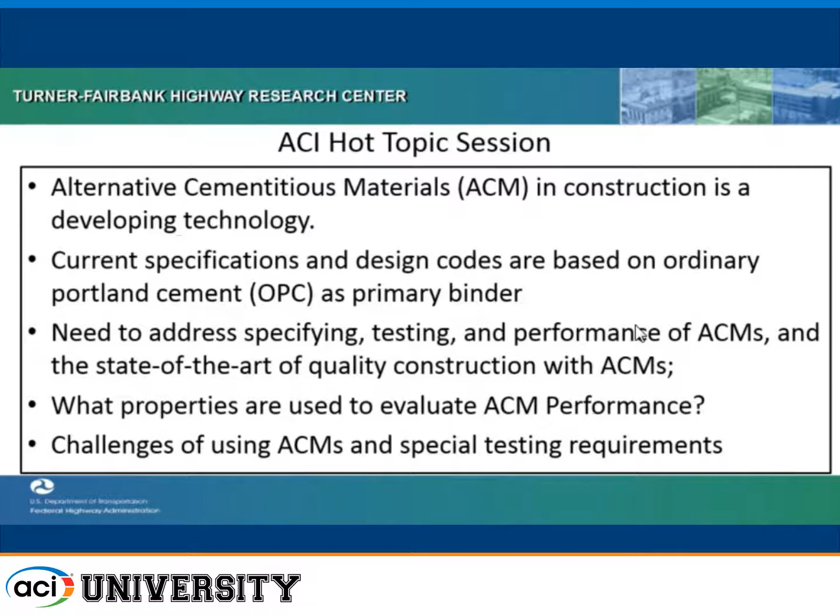What properties are used to evaluate ACM performance? Well, there's already been some discussion of that. I think we're going to have to adapt our test methods to look more toward performance rather than prescription, and we're going to have to develop special testing requirements for these materials.

The objectives, key factors are sustainability in transportation. This is certainly a topic that's being discussed quite a bit - not only the sustainability of constructing the pavements and structures, but also operating them, and how long they're going to last. Do they affect other sustainability functions within society as well? Carbon dioxide footprint is very important, along with long-term durability in all types of weather and climate that we see in the highway system.

Performance specifications and test methods need to be adapted for both cement and concrete. For the range of new cements, we need quality assurance tests for the cement itself. A state DOT is not going to just assume that the powder they're getting in the bin at the concrete plant is going to meet the criteria of building a quality structure. They're going to need some sort of target chemistry, fineness, and properties that they can check ahead of time to make sure they're getting the material they contracted to receive.

Concrete made with ACMs needs to meet both material and structural properties. We want them to be durable, but they also need to be predictable in terms of their structural performance, their volume stability, as well as their stress-strain and fatigue capabilities.

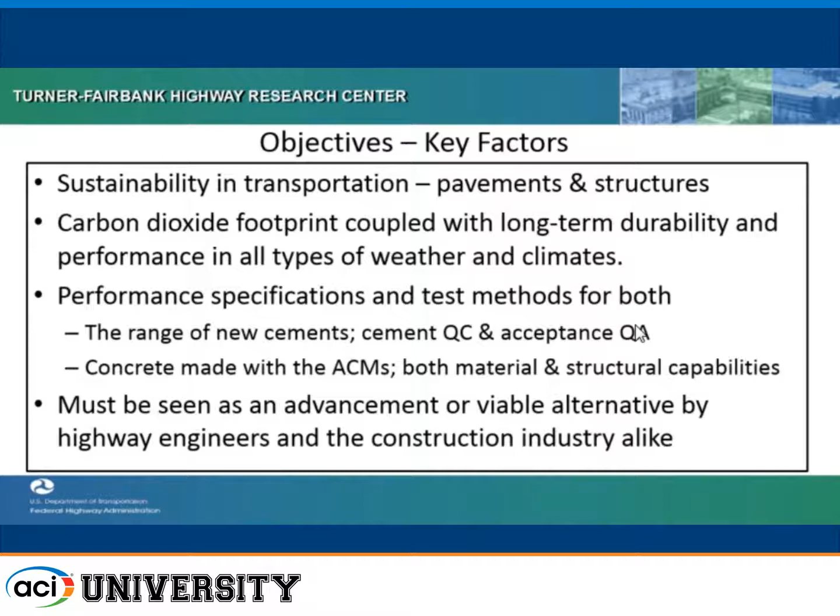Do we modify the tests and specifications, or is a whole new paradigm needed in qualifying these materials? How do we verify that we're building with quality? Many questions will be asked, such as compatibility with ordinary Portland cement - in many cases we may be using this in contact with ordinary Portland cement, and how is it going to perform? Are there constraints on what aggregates we can use, on how they are cast, the setting properties, as well as volume change and cracking tendencies?

Structural and corrosion properties with reinforcement are also very important, as has been addressed already.

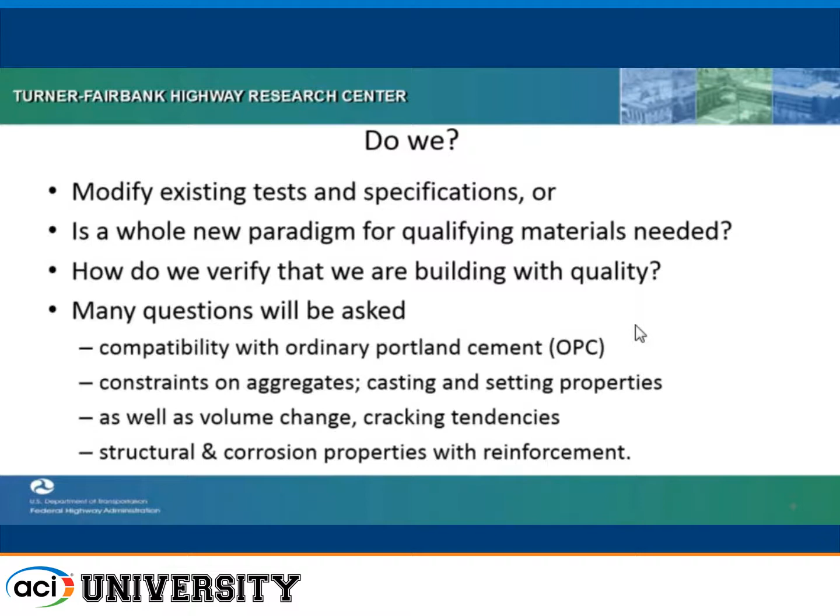Just a little background: Federal Highway has an exploratory advanced research program, and the project that Kim is working on is one of those projects - the project with Georgia Tech. We also have a project with UCLA and NIST on SCMs and ACMs, and a project nearing completion with Princeton and NIST on ordinary Portland cement hydration and nanochemistry, and how this can be applied to models of hydration. If that's successful, maybe we can move ahead and model some of the ACMs in like manner.

We recently had a workshop on ACMs and alkali silica reaction at Turner Fairbank Highway Research Center, and we think that was very successful - a lot of good conversation back and forth. As a federal laboratory, we also have the capability of doing cooperative agreements called CRADAs, where we can actually work with an industrial developer and see how the technology fits in with the highway industry.

We have two cooperative agreements that we work with, Ceratech in one case and Solidia in another. We weren't trying to develop the particular product, we were just trying to see how it fits in with the highway industry. Is it something we should consider?

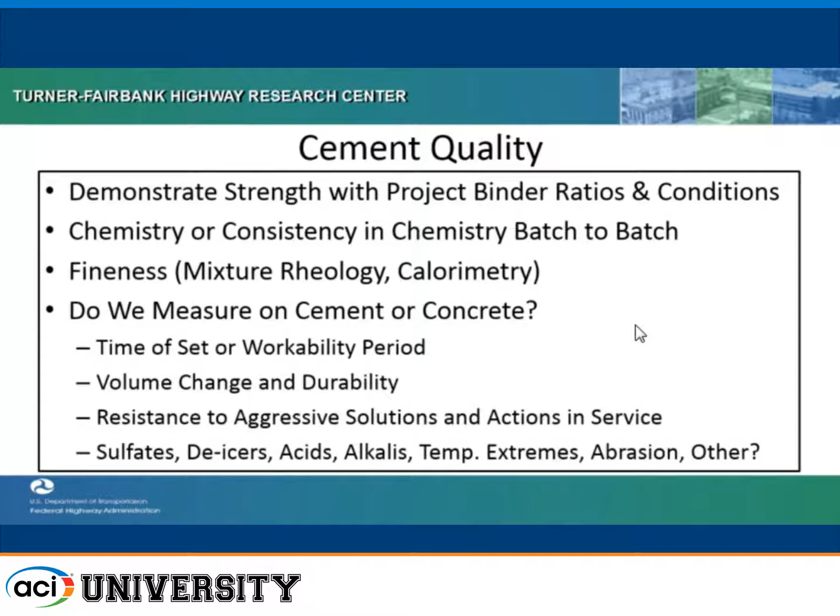Things like sulfates, de-icers, very important. Are they going to hold up over time in the presence of all the various chemicals we're using for de-icing of highways and bridges? Things like acids and alkalis and temperature extremes and abrasion, of course. Some states are still using studded tires, and if we don't have the abrasion resistance, that's a potential problem. Maybe some of these will be better at resisting studded tire wear.

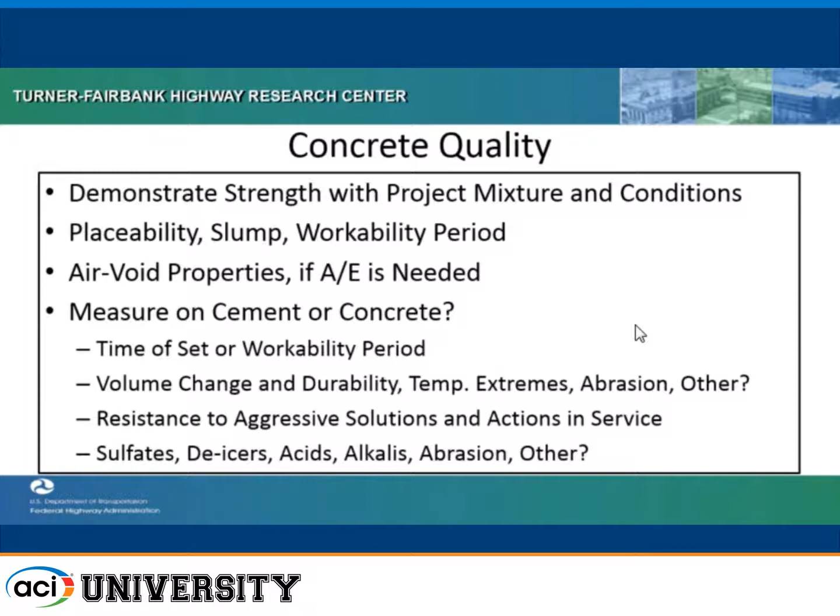On the concrete quality, we need to demonstrate for the particular project with a mixture that's going to be used, that you're going to get strength. Can you pump this material and place it if necessary? Air void properties - so far, most of what we're looking at, we're using air entrainment. Now, there may be some alternative cements that will have sufficient durability without needing air entrainment. That would need to be a factor to be considered.

This slide just reviews the current situation where most concrete infrastructure in the U.S. and Canada probably is ordinary Portland cement, but we are using quite a bit of the various different supplementary cementitious materials - quite a bit of Class C and Class F fly ash. Many agencies are going to higher amounts of fly ash. We're also discovering that the fly ash supply is changing. What fly ashes were available in some cases are not available anymore, and you may have to go somewhere else to get them. So to some extent, agencies are switching around to different materials that they're using, and this is somewhat of a challenge.

Slag cement is being used quite a bit, silica fume to some extent. There's more and more interest in natural pozzolans, particularly as fly ash may not be available in certain areas, then natural pozzolan may be a substitute for the fly ash, particularly in alkali silica reaction mitigation. Some state agencies are routinely using ternary blends as well.

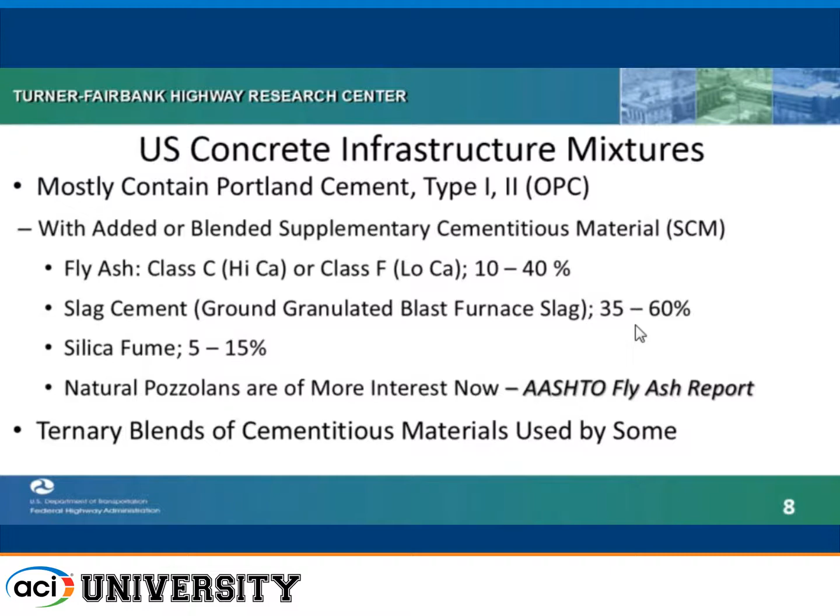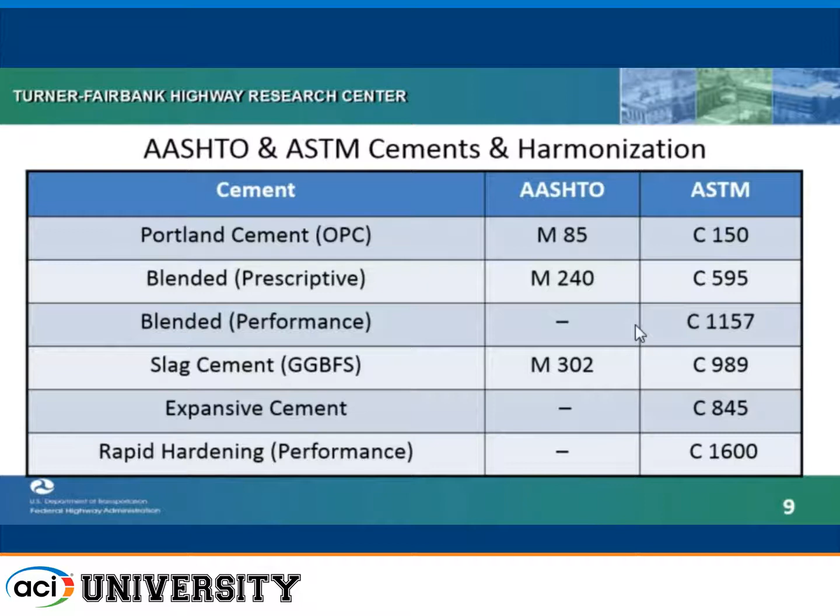This just kind of reviews the different cement specifications. To a large extent, for the typical cements that we're used to using, AASHTO and ASTM have harmonized so they're pretty much the same specification. But ASTM does have the performance blended cement, the C1157, the expansive cement specification, and the rapid hardening performance specification. Those might be used for some of these alternative cementitious materials since they're based mainly on performance criteria.

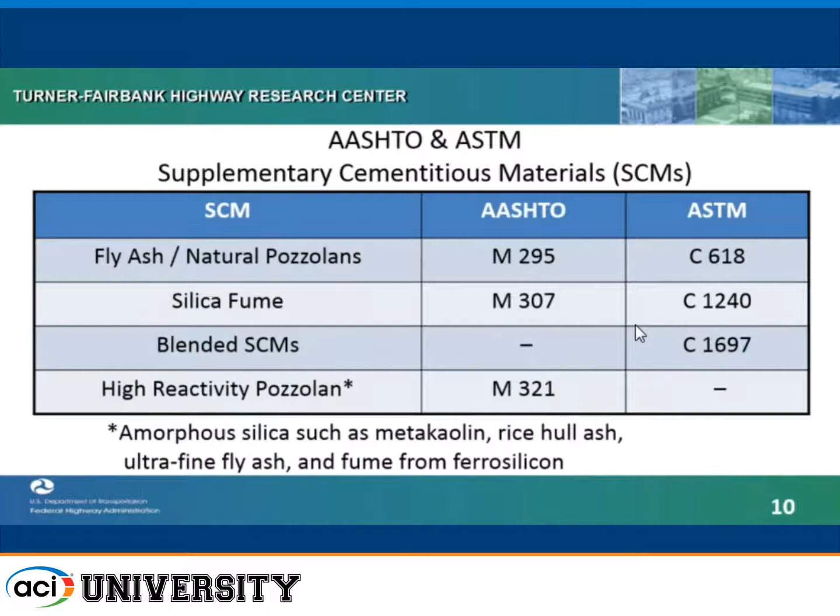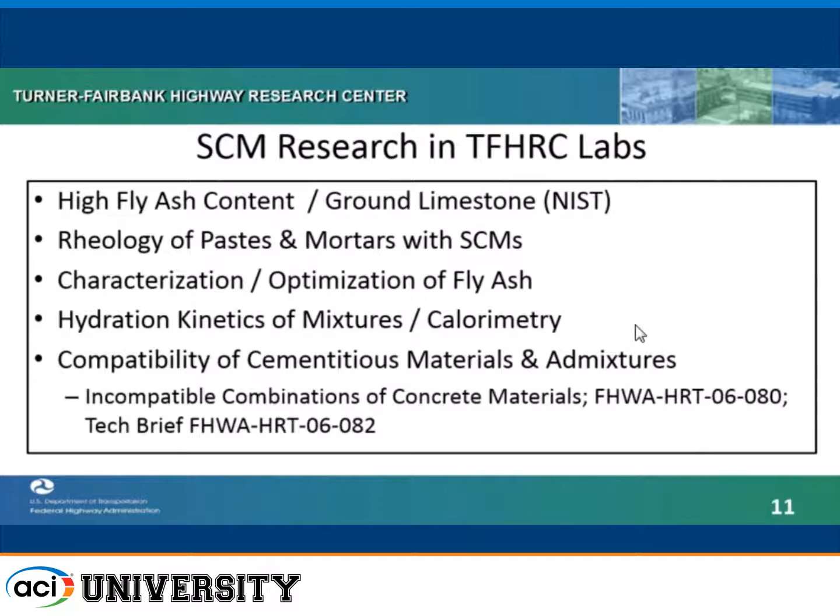These are the specifications for supplementary cementitious materials, which, as was discussed, we're trying to use more and more of these materials. In terms of the research we're doing at the Turner Fairbank Highway Research Center, we're taking a look at higher fly ash content. We're working with NIST on using more ground limestone with Portland cement. We're looking at rheology of pastes and mortars with these different materials, characterizing and optimizing fly ash. We have the capability of looking at the calorimetry and the kinetics. And there's some previous work done by Peter Taylor on the compatibility of cementitious materials with admixtures, which addresses various tests that might be used to look at particular cements with particular admixtures.

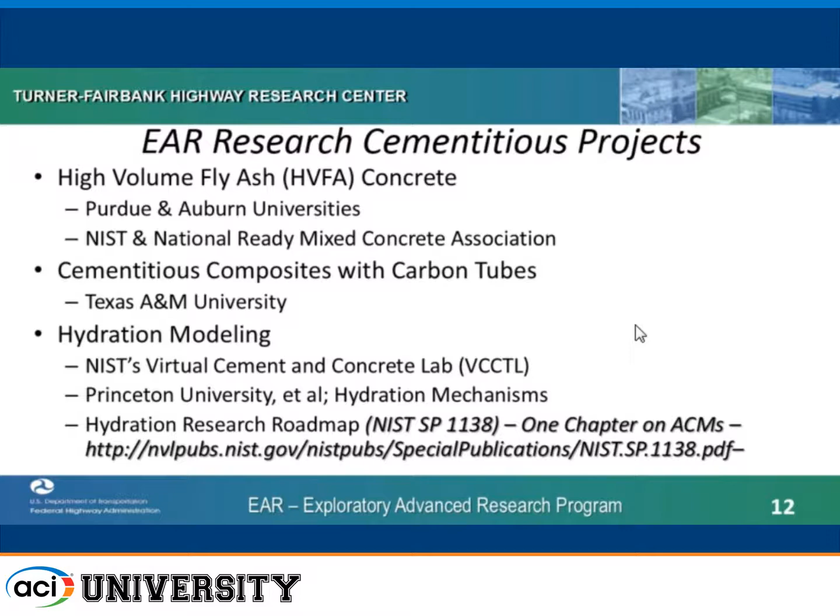With respect to our exploratory advanced research program, the high volume fly ash studies were done with Purdue and Auburn universities. Also NIST and NRMCA were involved. We did some work with cementitious composites with carbon tubes with Texas A&M, hydration modeling with NIST and Princeton, and also Federal Highway helped support the Hydration Research Roadmap, which is a NIST publication, and there is one chapter in that publication on alternative cements.

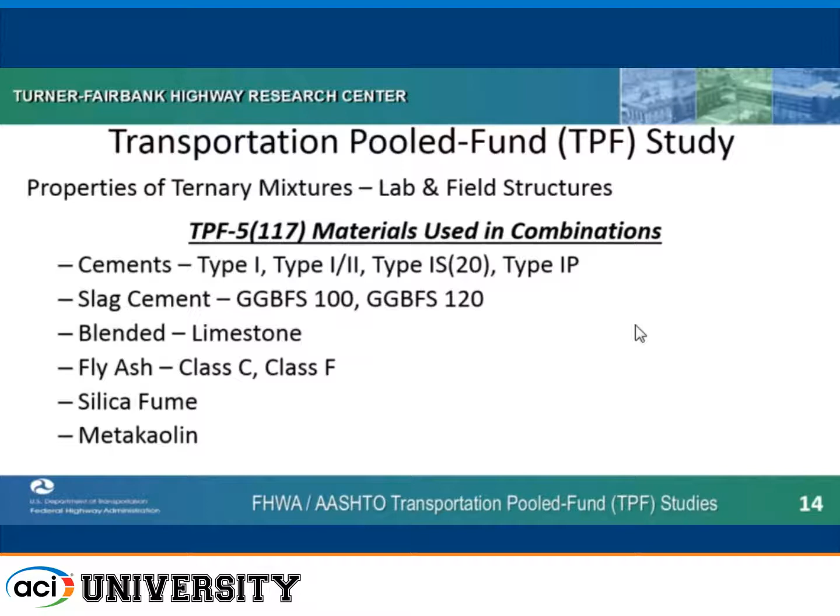With respect to alternative cementitious materials, we do have a federal agency steering committee which has occasionally met. There are other agencies interested in these materials, particularly the Corps of Engineers, NIST, and the Department of Energy for some of the nuclear research as well.

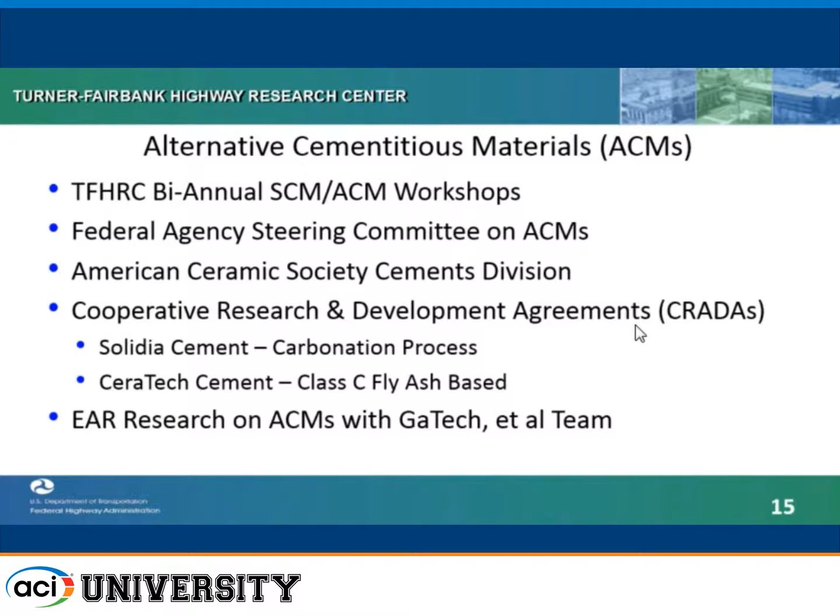As I mentioned, we do have these cooperative research and development agreements. With respect to those CRADAs, the conditions are that we, as the government, are not directly endorsing or promoting these particular materials, but we're working with the developers of the technology to see if they would fit into the type of materials engineering that we use in the highway industry. I'm not going to get into any detail on exactly what the technologies are.

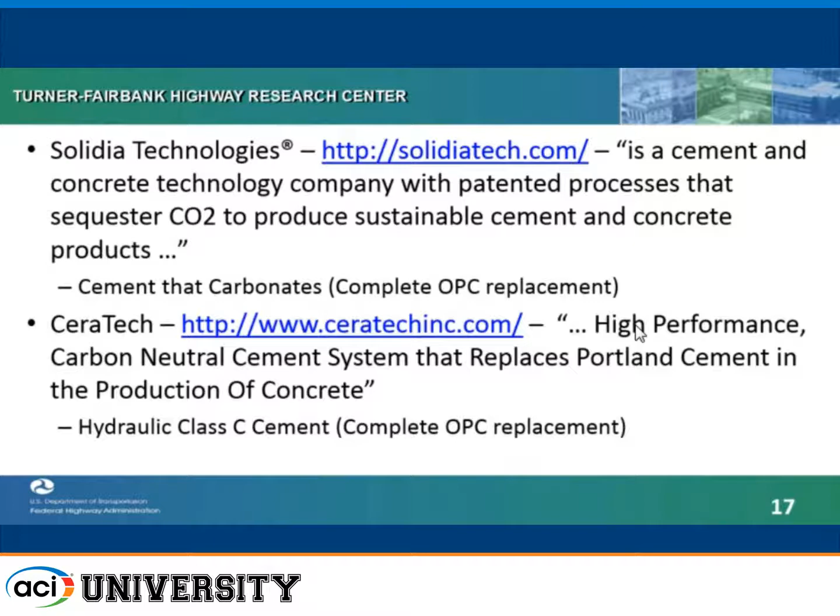Both Solidia and Ceratech have white papers on their websites that describe the technology. Solidia is basically a cement that carbonates rather than hydrates, and Ceratech is a system where you have a hydraulic Class C fly ash where the hydration of that material is controlled, and you get properties similar to Portland cement concrete.

With Solidia, we recently completed some freezing and thawing tests, again with our 3/4 inch maximum size aggregate air-entrained concrete. I think that was 540 cycles of freezing and thawing, and in general the material's holding up very well. We're getting a little bit of scaling, which is not a surprise.

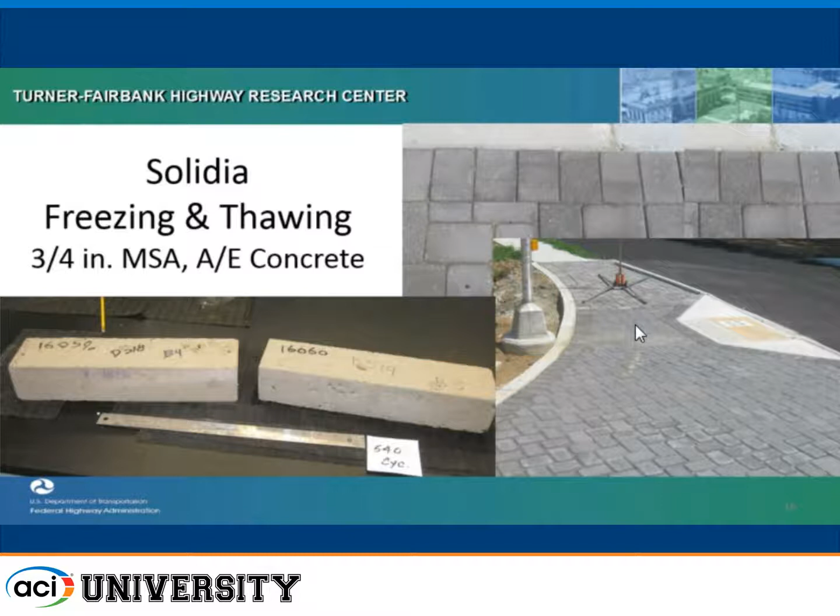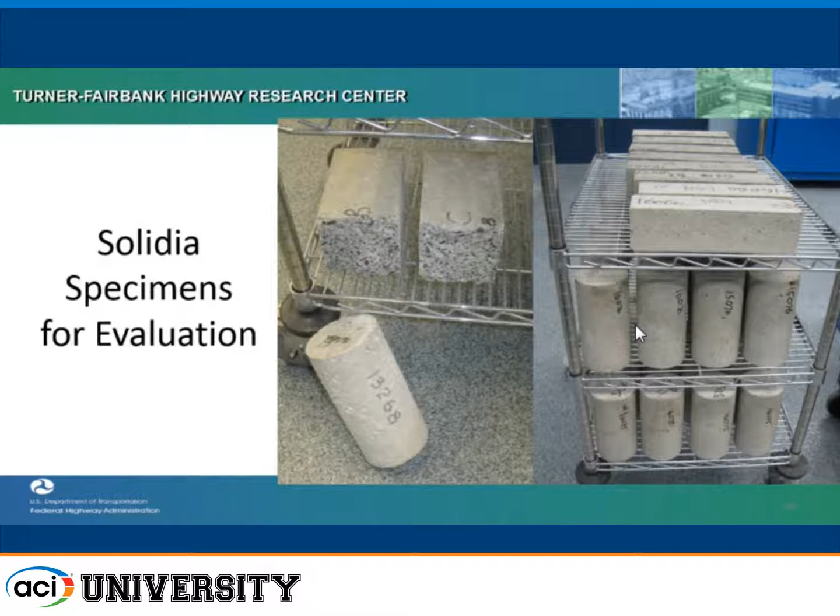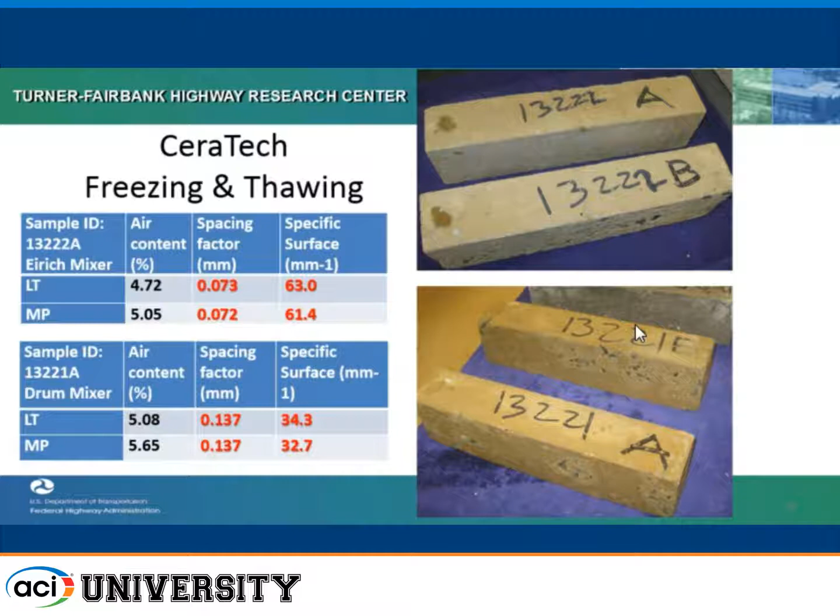With Ceratech, we've done freezing and thawing work with it. We actually mixed two batches in two different mixers, basically the same material—one in a high-energy vertical shaft mixer, and the other in an ordinary drum mixer. The freezing and thawing durability results are pretty good on both, with a little bit of scaling again. But it's interesting to note that the spacing factor with the high-energy mixer is about half that of the drum mixer, so we were making smaller air bubbles with that high-energy mixer.

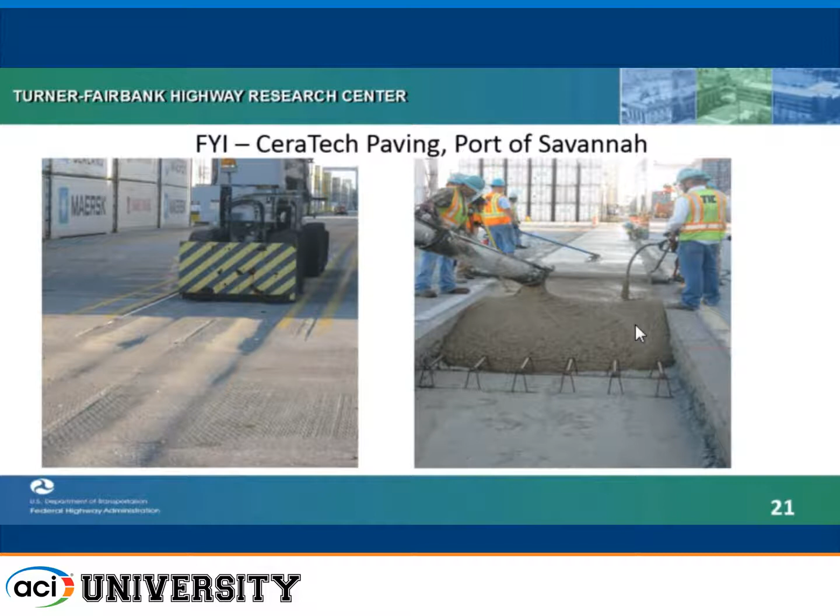With Ceratech, it has been used in various industrial and transportation applications. This is an example from the Port of Savannah. I went down and observed a project where they were doing paving, replacing the rutted asphalt pavement for the heavy cranes used to move containers around the port. This shows the concrete actually in use in that particular case.

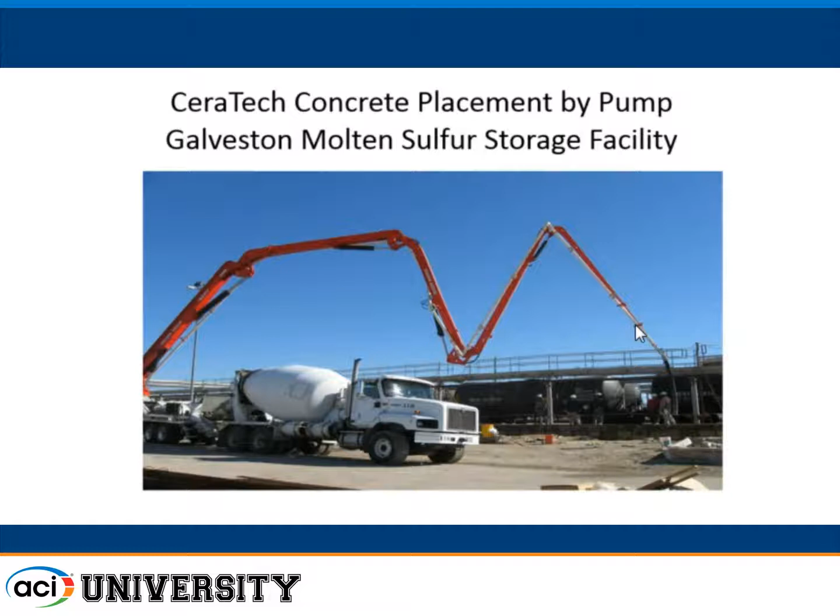I also observed a placement by pump with the Ceratech material, the 100% fly ash-based cement, in Galveston at a molten sulfur facility. In general, the concrete looked a little bit different maybe, but it went through the pump and was placed in a reinforced concrete wall with no apparent problems.

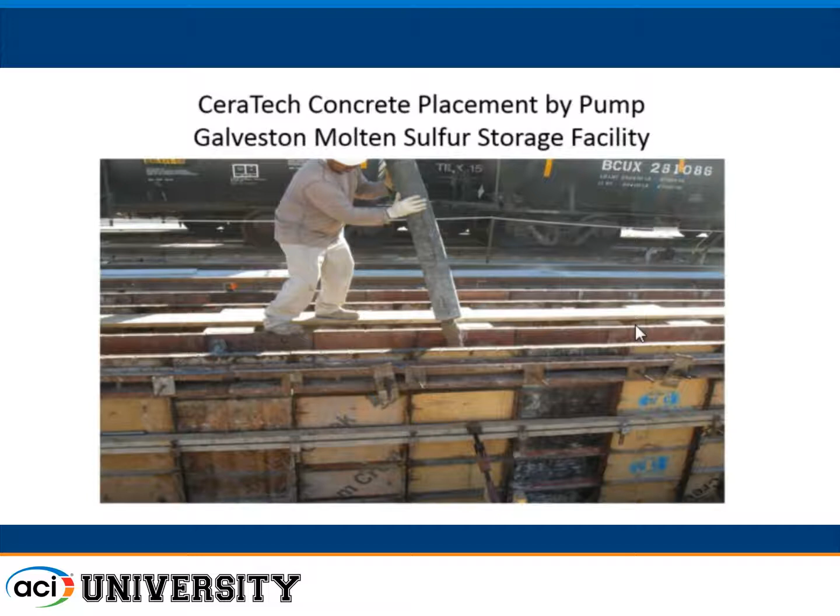Our structural lab has started to do some structural properties testing on some of these concretes. Unfortunately, they've had a bit of an interruption, and hopefully they can get back to it in about two months. But they developed plans for looking at structural properties, in addition to mix proportions and basic properties, to take a look at bond to reinforcement, stress block parameters, creep and shrinkage testing, and full-scale testing of structural elements would be down the road, hopefully.

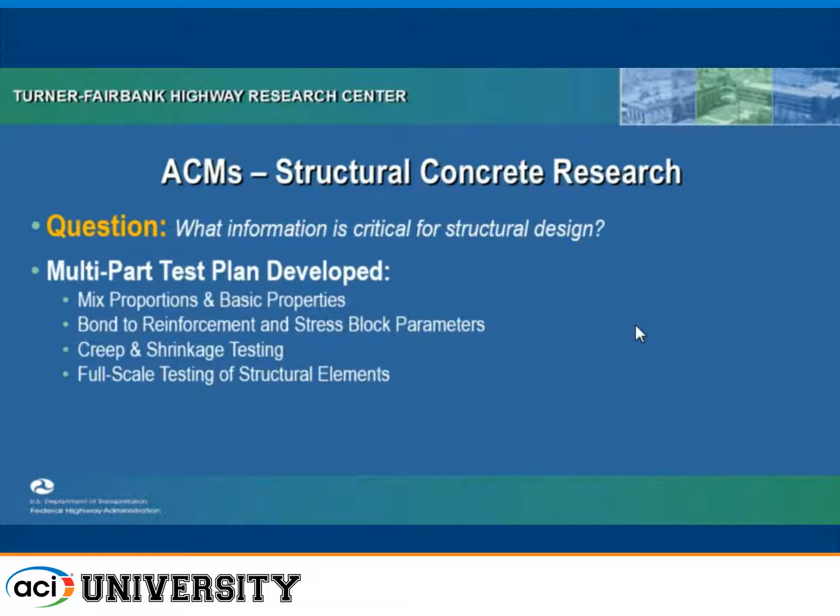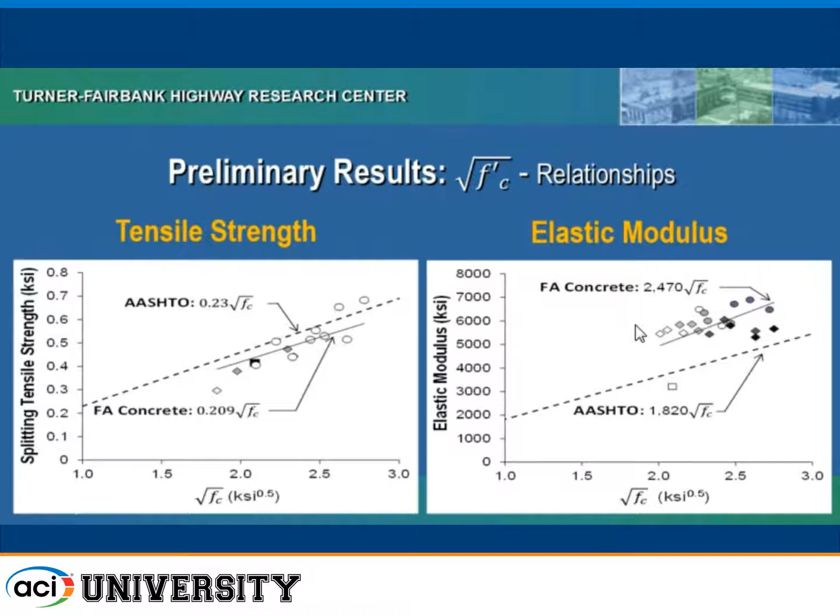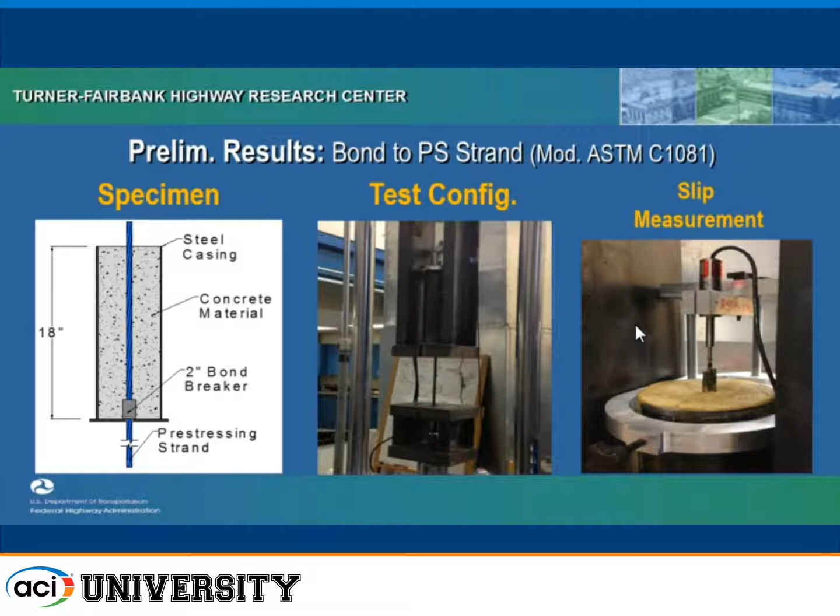This is just some preliminary results with the high fly ash concrete, where we took a look at splitting tensile strength in relation to compressive strength, and elastic modulus in relation to compressive strength. We also did some initial pull-out bond to pre-stress strand tests using a modified ASTM C1081 test, and preliminary results on a RILEM test for bond to rebar. This shows some of the preliminary test results. Unfortunately, we've just begun getting into this and getting a little data, but have not been able to continue it at the present time.

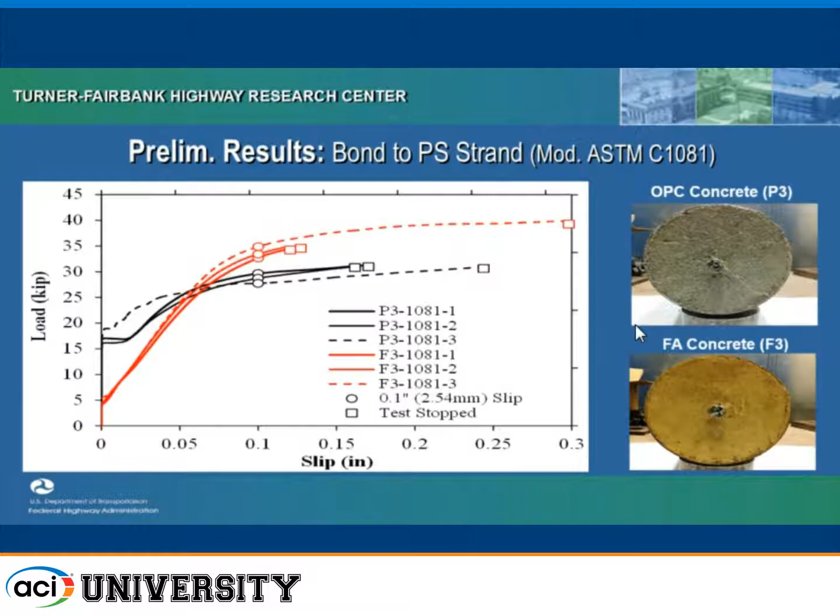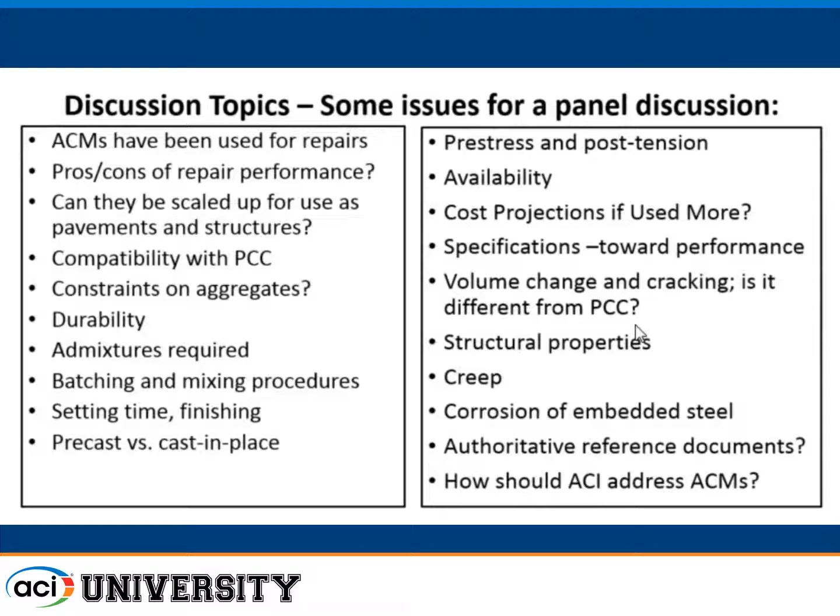So that basically is what Federal Highway is doing, and the chair had asked for some potential discussion topics, so I put on this last slide just an example of some of the topics if we wanted to discuss.